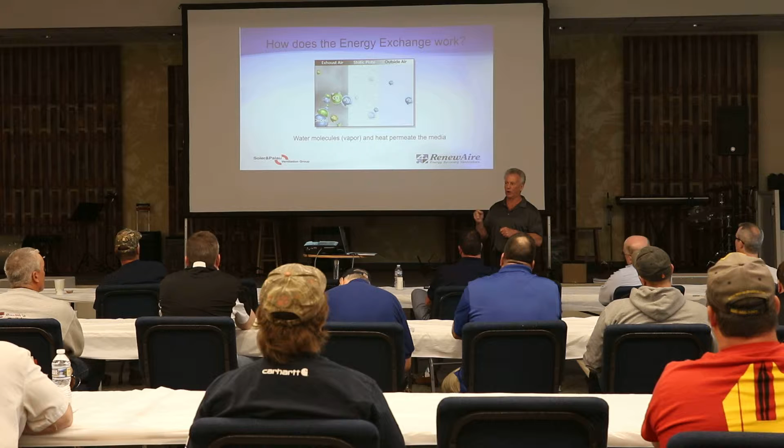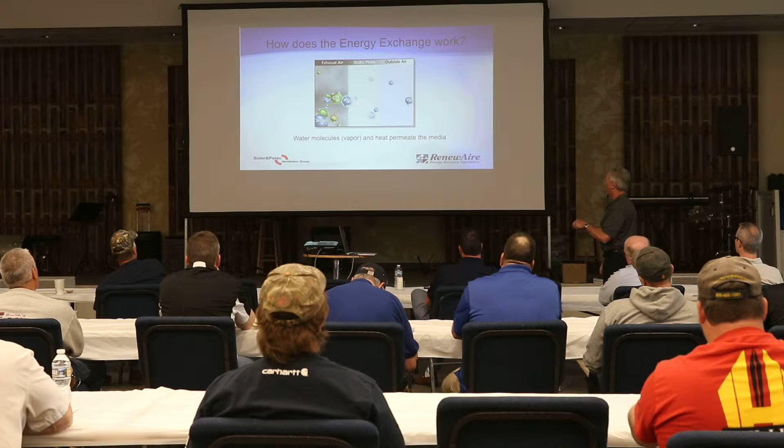And you can check the RenewAire listing there. They're certified for 0 cross-contamination or 0 EATR. We will not transfer anything from one airstream to the other. And it all goes right to this. The finely sized pores, this is a very big exploded example of what the static plate would look like. But by diffusion, the water molecules will transfer through. Does that make sense to you?

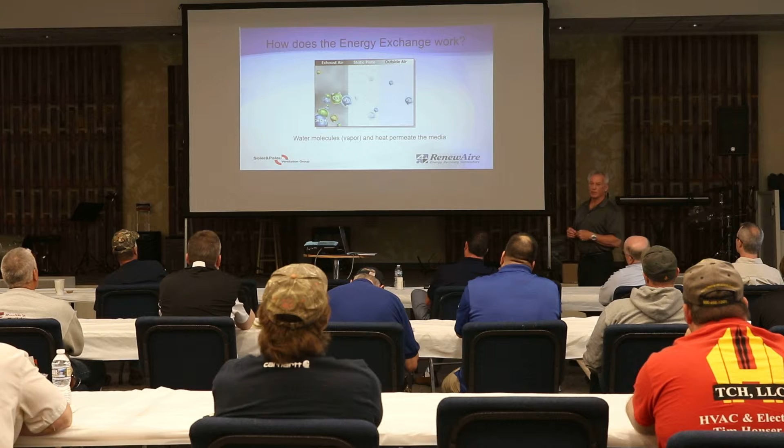Because of the pore sizes on the plates, we know that a water molecule is a 2.8 angstrom molecule, and it will efficiently pass through the core membrane. There are a whole list of other things that will be exhausted out of the building. And this is what I mentioned earlier. We are certified by AHRI for 0 cross-contamination.

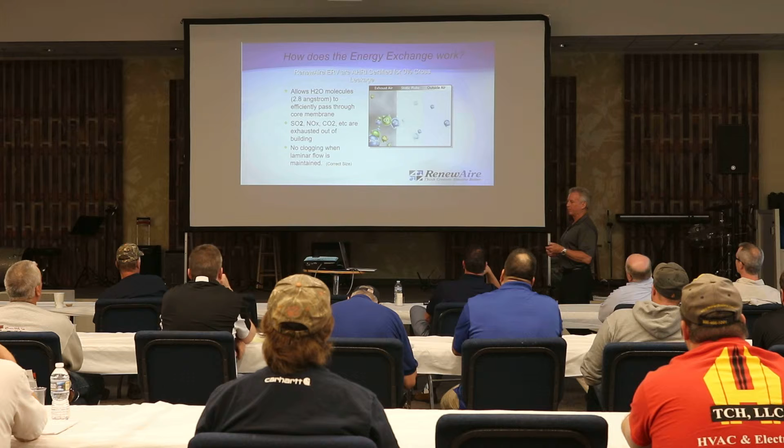So, just to sort of recap the fundamentals of energy recovery ventilators, what we're trying to accomplish is, in summer, the pre-cooling and drying of hot, humid incoming air, and in winter, preheating. And actually, in winter, at different outside temperatures, you're going to have different humidity levels. So we're actually going to be able to introduce some humidity into the space through an ERV.

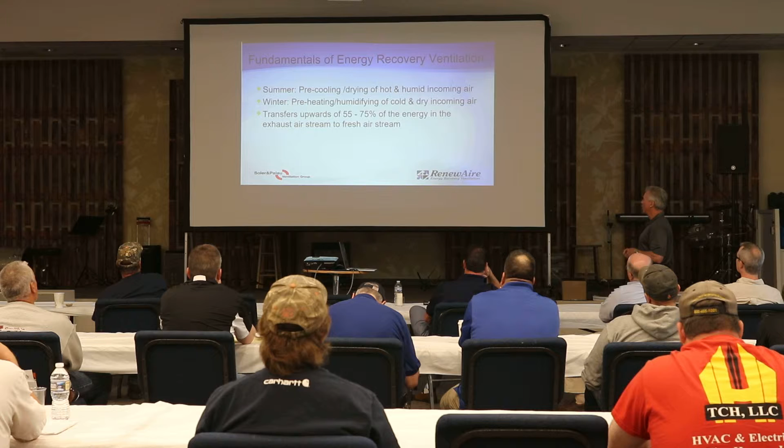But the effectiveness of the transfers from one airstream to the other will be somewhere between 55 and 75% of the energy that is carried in the exhaust airstream. Yes.

And by the way, I suggest this to you, if you're going to look at a manufacturer for a balanced airflow solution here, look into the entities that certify their performance. For residential application, and it's up to 300 CFM in that case, HVI is the certifying body, Home Ventilating Institute. You'll find RenewAire listed there prominently.

For above 300 CFM, AHRI is the body that oversees that. UL is listed for both, we have UL listings, not just for the electrical side of it, but also for the flammability rating on the core material.

So, since I'm picking on you, we're talking about some very small openings here, right? So it would be natural to ask the question, do those things get clogged up, right? Well, when cigar bars started, RenewAire was used in a lot of cigar bars.

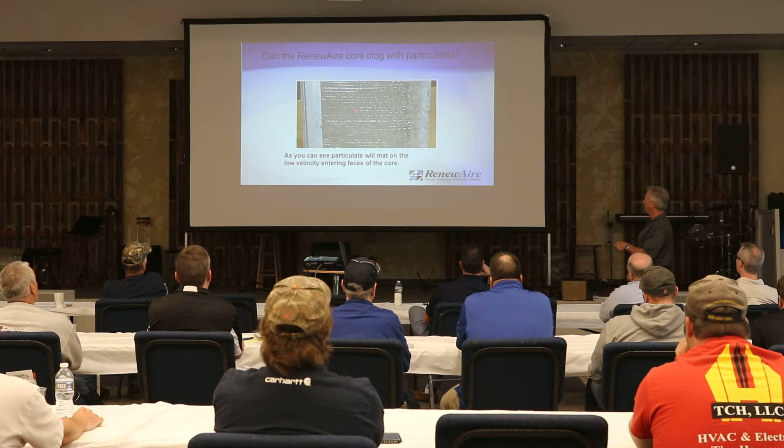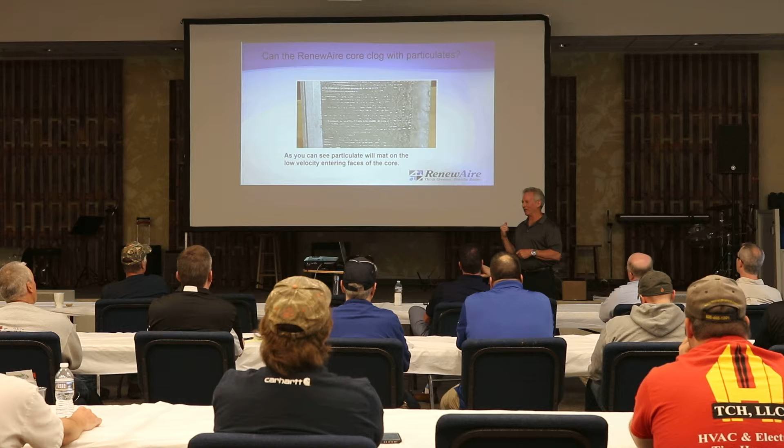And I know for a fact that this core right here was brought back from a cigar bar in New York after it had been in use for 3 years. So what you're looking at here is a core that was pretty well abused. It looks like they didn't even have the filters in. You know, the only maintenance that's really required on these units is to replace the filters. And you know, this was one abused looking core.

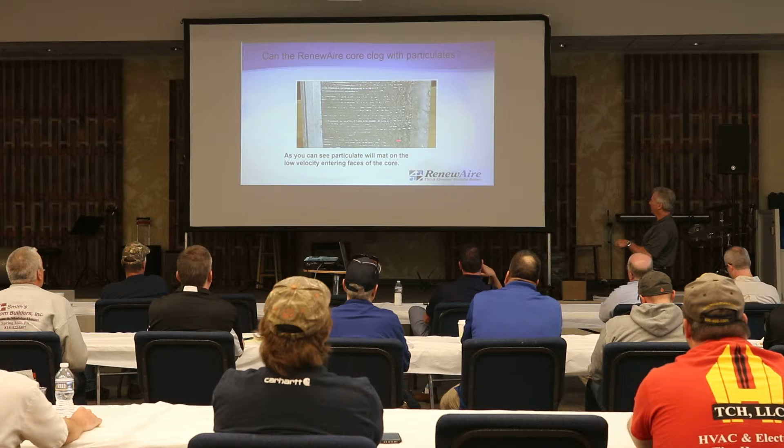But what you'll see here is maybe a worst case scenario where the particulates will mat on the low velocity or the entering face side of the core. But what we did in this case was took this and peeled it back. And what you'll see here is an example of the tars and nicotine, or tars primarily, from this cigar bar that discolored just the leading edge of the core material. But as you can see, nothing was carried inside.

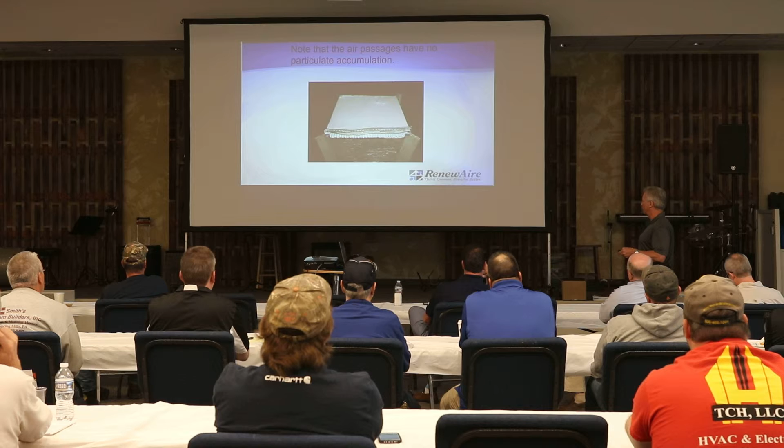And what we tell you, in commercial applications especially, is that you have to have the regular maintenance, and we'll tell you after so many hours you need to be replacing the filters. And then an annual visual inspection of the face area of the core. And you can solve a problem like this by simply using a soft shop vac brush to clear that material off of it, so it does not get entrained into the ERV itself.

So following up on this, our core materials are warranted for 10 years, and the life expectancy of them is usually 20 years. And every time we go to replace a core for one reason or another, we have to fill out a form to justify why we're changing out the cores. We've never replaced a core under warranty in the 15 years that I've represented RenewAire.

Now, the core material itself, if you looked at it, you would say, well, that's just white cardboard. And because I'm a wise guy, I say, well, we couldn't possibly charge you this much if it were just cardboard. But it is a material that is treated with a hygroscopic resin, and it helps create that affinity for moisture transfer. But because it has that ability to absorb or transfer moisture, the one thing you can't do is put it in an application where humidity would overwhelm it. An example of that would be an indoor pool.

The other thing you can't do is wash it with a hose. And I have had people that have done that. Because in that case, it wants to absorb all the moisture. That's not a warranty claim, by the way.

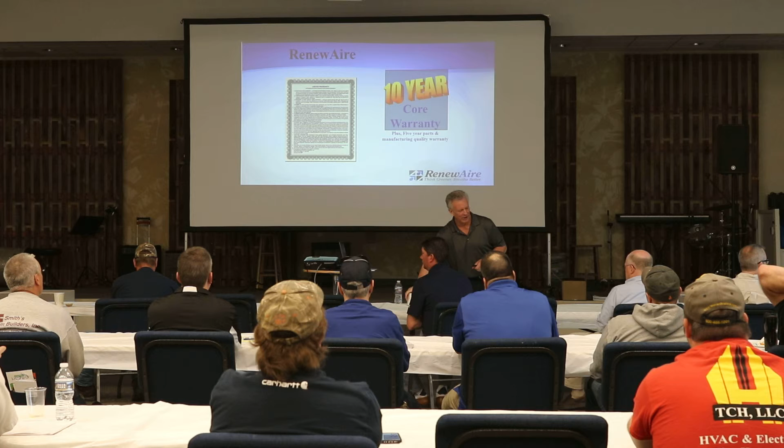Oh yeah, throw them around. You can open that top. The top kind of gives you an idea of which way the airflows are. You won't break it, you can just open it up.

Let's talk about controls for a minute. There are several different ways to control these units locally. You can also do a tie-in, you can do fan interlocks. But to address the intermittent side of the code, you've got proportional timers that you can set for each unit, and it will run a percentage of each hour. And then you can do spot or point of use controls as well, so that gives you a manual override in a local way.

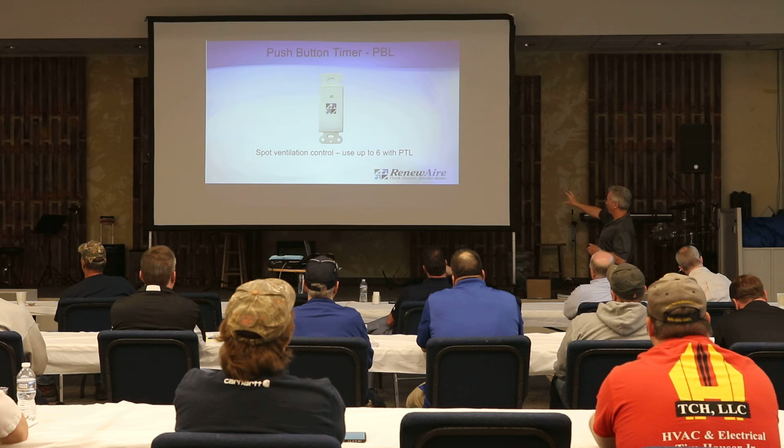And as I said, the third option is a furnace interlock or a fan interlock, and that's probably the one that we'll use more than anything else. The proportional timer or the point of use controller is something you can use typically right in a bathroom. If we're taking the place of a bath exhaust fan, the point of use control would be the best one to use. And you can tie that in with a proportional timer so that it would run for maybe 20 minutes or whatever you want, locally in each device.

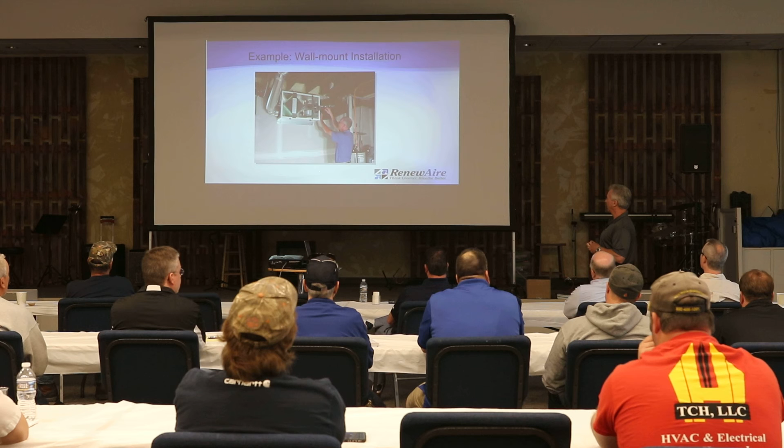This is an example of a wall-mounted installation. In most of our units, and most HRVs or other ERVs, you're going to have 4 connections, 2 from the outside, 2 to the inside, and it's just a question of how you're going to do this.

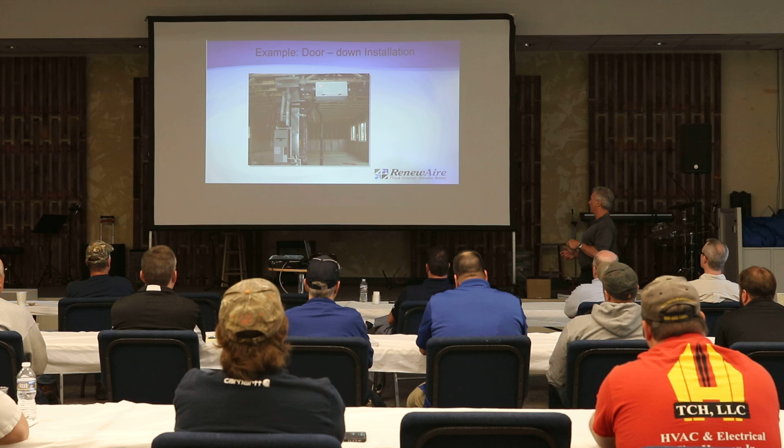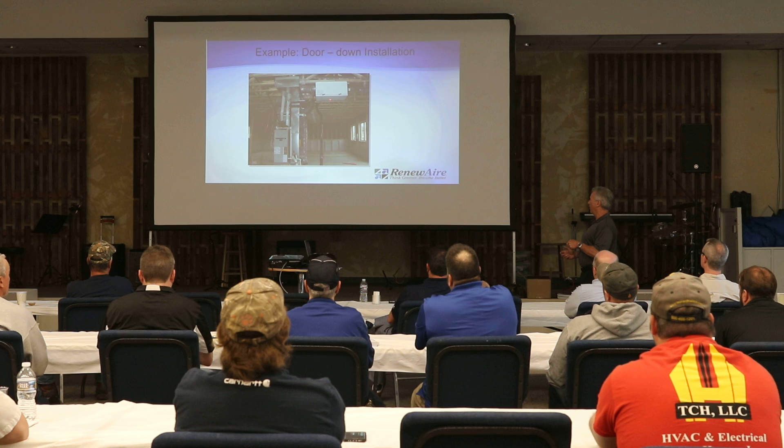So that is what we call an EV130. It's 130 CFM. Just to illustrate the flexibility on the installation, that can be wall mounted, and that same unit can be ceiling mounted. The access panels have slide hinges right here, and it's entirely removable and easy to access.